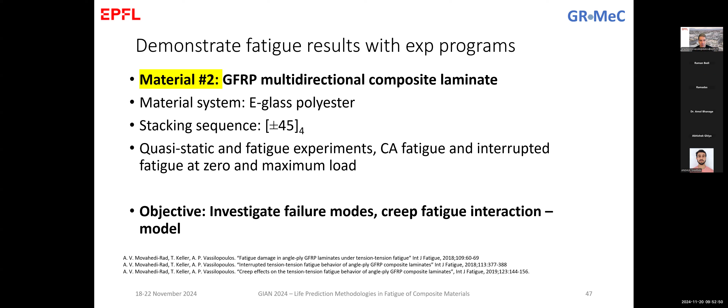I'll jump directly to the description of the experimental program. So what we did, as mentioned: we did continuous fatigue until the end, then we did interrupted fatigue loading at high stress during the interruption, keeping a high stress which was exactly the same as the maximum stress of the cyclic loading.

There we kept two different interruption times to simulate creep, 2 hours or 2 days. We also did interrupted fatigue while during the testing - we were interrupting the constant amplitude fatigue loading and going down to 0, unloading the specimen completely.

In all these cases, as we mentioned, we kept the specimen in the machine. We did not remove the specimen, to avoid what we discussed also yesterday: the effect of the gripping pressure, the alignment of the specimen, and so on.

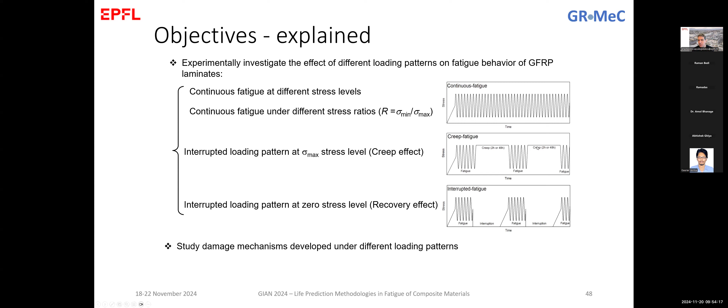So we then studied the mechanisms developed under the different loading patterns, to be able to correlate the observed phenomena to the, let's say, physics of the failure.

The material that was used was a glass epoxy laminate with plus minus 45 layup. We fabricated everything in our lab with a vacuum-assisted hand layup technique. I suppose you are familiar with this method, where we stack the plies in the orientation that we would like, apply the resin by hand, and then put everything in a vacuum to make the production more consistent.

From these laminates that we manufacture, we cut specimens according to ASTM D3039, which defines these rectangular specimens with the tabs at the ends. Then we used some techniques for the measurement of the strain with a video extensometer.

Video extensometer is similar to what you know today as DIC, but it only measures specific points. It does not give full field measurements, but I would correlate it more - I would say it resembles more a clip gauge. You have 2 points, and then you measure with the photos the distance of these 2 points, or 2 lines that you have in this case. Why did we do this?

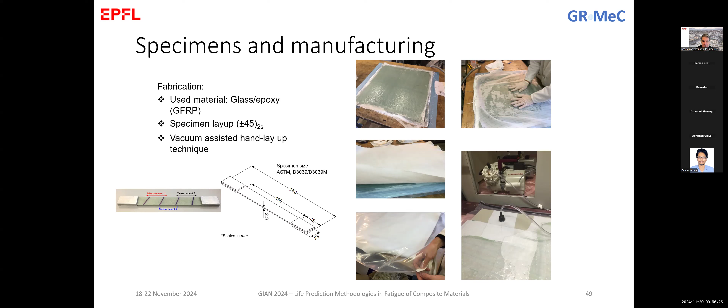You see in this photo, we have measurement 1, measurement 2, and measurement 3. The reason was that we wanted to have, first of all, the overall strain of the specimen, but also we wanted to have the local strains of the specimen, to be able to correlate this to the damage that was observed.

So fatigue testing, we'll just open this one. Fatigue testing was as usual in the chamber to keep the temperature low. We were also measuring, we have a thermal camera monitoring the temperature of the specimen. We had this video extensometer camera to take photos of the specimen and be able to extract at the end the strains. We also have a light source to improve the lighting, necessary to improve the performance of the photography.

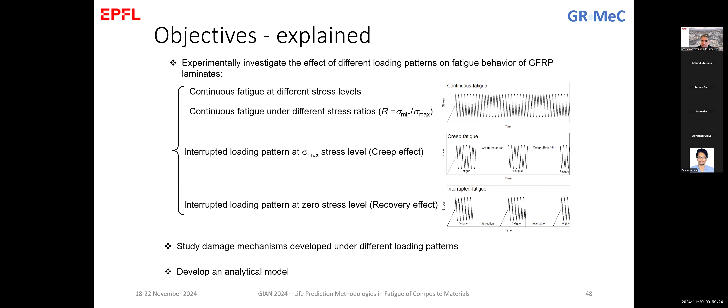So imagine when you do this experimental program, the simple recording of data when you need a simple S-N curve is to record the maximum stress and the number of cycles to failure. Only two data points. If you need to have also the hysteresis loop area, you need to record every cycle, more than 10, 15, 20 points per cycle. So you need the stress, the strain, and the number of cycles. And if you have this, you can use these data points to plot these cycles with 20, 30 points depending on the accuracy that you want.

So you see already the complexity of data handling. Here is again the question about the capacity of the machine, as Professor Bedi mentioned before, the capacity of the recording device to record so fast data, the capacity of your camera, this video extensometer camera, the frequency of photos that this camera can take, so that it gives you directly the measurement of the strain, and another point that is very significant here.

You see that we use different equipment for different measurements, and at the end we want to put them all together and draw curves. So what is very significant, and we've seen in the past that it was causing a lot of problems, is the synchronization of all these measuring devices. If you measure load with the machine and then measure strain with the video extensometer camera, and they're not synchronized, the camera gives you a strain value that does not correspond to the stress at the same time interval, and all the results will be falsified. So all these parameters have to be confirmed during preliminary experimental programs before even going into the full experimental campaign.

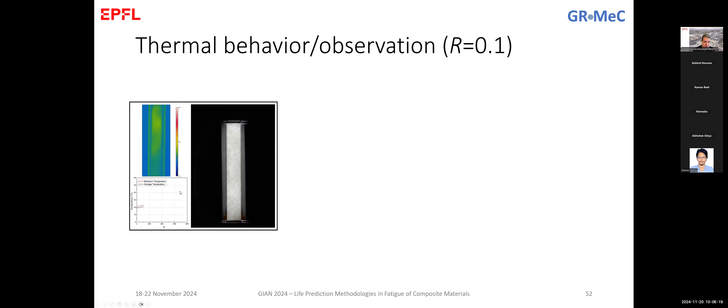Here is the thermal behavior. If you remember, we used photography with a backlight — these are the gray photos you see here — and we also used a thermal camera that gives directly a measure of the surface temperature of the specimen. You see that these two are correlated well.

The damage we can observe in the specimen is when the specimen becomes darker — these are cracks evolving in the specimen bulk. At the same time, at the location of this concentrated damage, we observe an increase of temperature, which is the result of increased friction in that location. At the end, when we go to failure, the temperature rises quite high.

This shows the limit of why we confine the frequency of the specimens. In our case, the specimen failed; although we started the test at around 20 degrees, it failed with a local temperature around 40-something degrees. Going back to the DMA result for this material's thermal analysis, we see that 50 degrees is still within the glassy region of the material, so for us this is an acceptable failure.

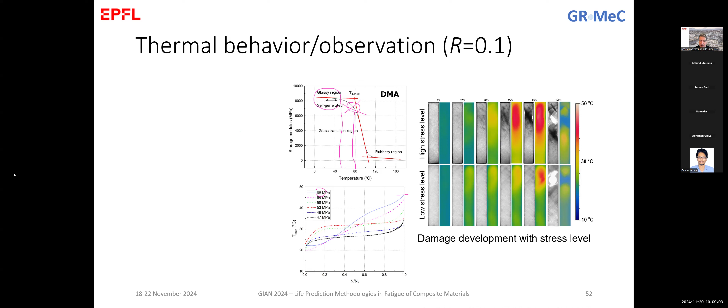Coming back to the discussion we had before and trying to explain this effect: at high stress levels we have fiber pull-out because the excessive load was significant enough to pull out the fibers directly. Remember, the fibers are not continuous from one loading point to the other, as we have the specimen loaded in the machine. So at high loads, these fibers were teared out directly from the specimen, with very local, very little damage in the bulk of the specimen.

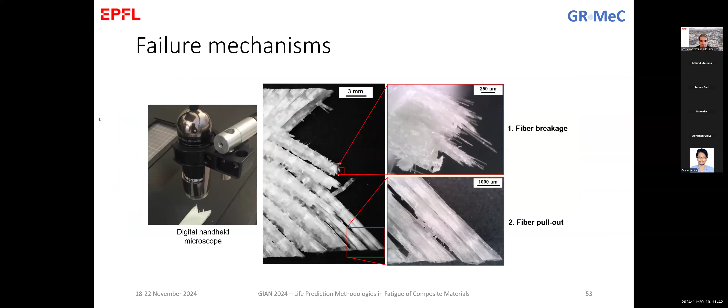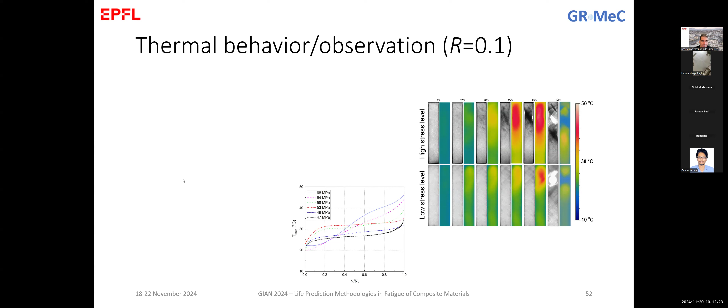Going back to these observations, this photo shows a comparison between the high stress level and the low stress level, and we can see these effects. In high stress levels, we have localized damage that led exactly to this fiber pull-out. In lower stress levels, we have distributed damage—you don't see any significant damage concentration anywhere; it is spread all around the specimen. This is the reason damage accumulates as matrix failures and causes this failure mode at the end.

Hello, sir, I have one question. Yes. Sir, what is the effect you are seeing in thermal imaging?

That is because the fibers are plus minus 45. Would we also see similar behavior in UD composites? Yes, you mean for the thermal? For the increase in temperature? Yes, you see it, but it's not so significant. Sir, is this effect because of friction between the fibers? The thermal increase is due to friction between damaged surfaces. In a unidirectional material, you don't have as much damage during loading as with plus minus 45, and the deformation is not as significant. So if you have reduced deformation, it means reduced friction, which means reduced temperature increase.

One more question regarding the experimental setup, about these fans. Are these fans to maintain the ambient temperature constant, or are they also taking heat away from the specimen? Yeah exactly, the fans are not for maintaining.

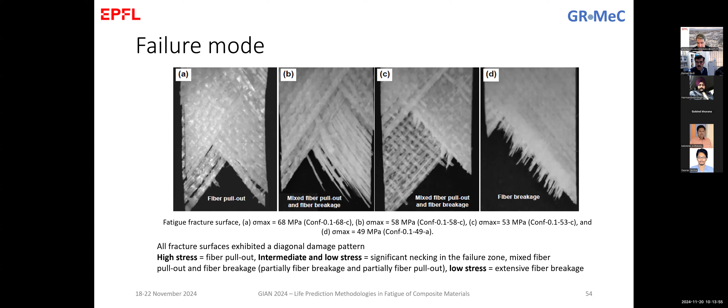But why do we want to lower the temperature of the specimen? Because you need to keep the frequency as high as possible without heating the specimen. This is the reason for putting the specimen also in the chamber.

During the loading, you increase the temperature. Yes, if you let it without the chamber, it might be that the temperature at the end goes to 80 degrees. So your specimen fails, but fails not in an accepted way because it is softer.

So to avoid this, you can do two things. Either you test at very low frequencies, so you have to test the specimen at 1 or 2 hertz, which takes ages at the end to finish your testing. Or as an alternative, you try to cool down the specimen somehow. In this case, we found these methods with the chamber and the additional fan that seems to work quite well.

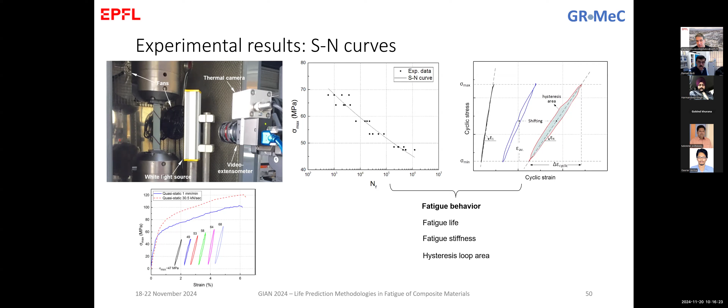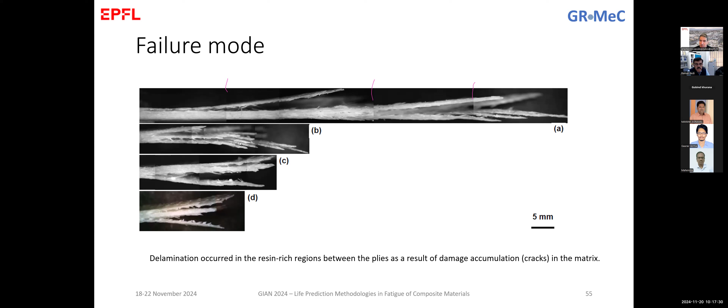But what we see here in this slide is the delamination that occurred in the resin between the layers. So these are layers - one layer, second layer, third layer, and so on. We had in total 8 layers of material, and we see that during the loading you have a lot of delamination in different places of the material, and this delamination propagates. It's not only localized at the fracture region, but it is propagating to the specimen around the crack, around the damaged area.

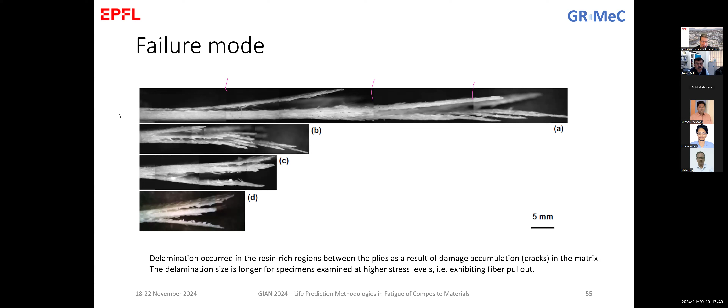So you probably remember, there is a lot of repetition of results, and it's a proof or validation of what we were discussing the previous days. We discussed about this reorientation of the fibers, and here we quantified this. We've seen that in our case, we had more or less even up to 3-4 degrees of angle change with the loading.

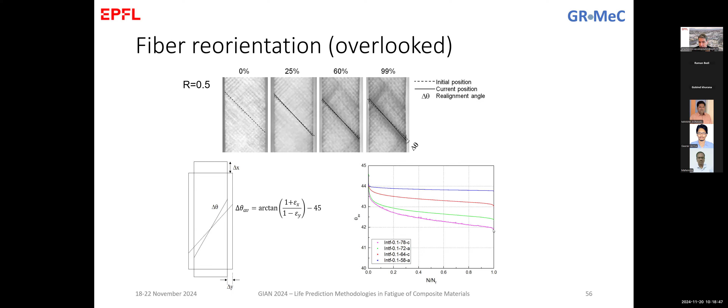And especially, of course, you can imagine this angle increase or reorientation, as we call it, is more significant for higher loads, because when you load at higher stresses, you actually apply more pressure to the material, and it changes more. So at low stress levels, we've seen 1 or 2 degrees, and at high stress levels, we had up to 3-4 degrees of reorientation. This is quite significant depending on the material, on the anisotropy of the material.

When the fibers orient in different directions and become aligned with the specimen loading, then the specimen is stiffer than before. That's why we can explain this increase here.

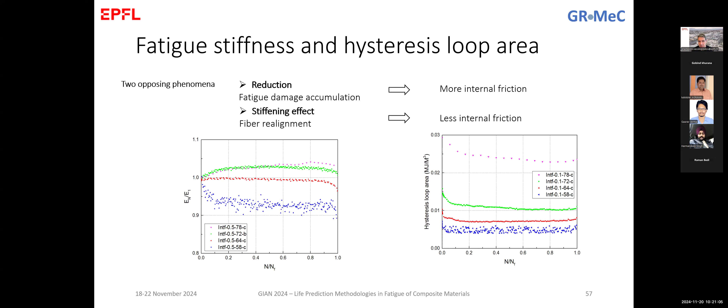Another part of the investigation was the loading type. We did two different loads, both tensile, so we avoided compressive loading to prevent buckling problems and didn't want to use anti-buckling devices. We've seen that the scatter was more at R=0.5 compared to R=0.1.

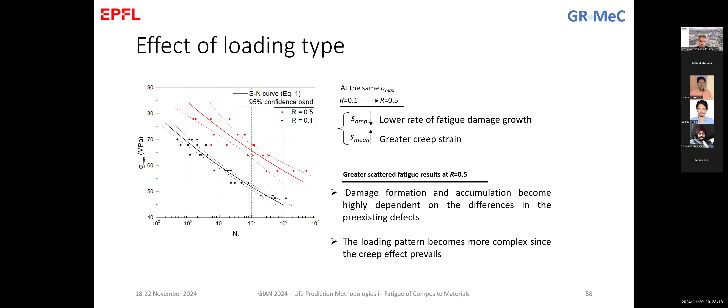This is probably related to the maximum stress. Let me plot this and start the discussion about the creep effect we'll see later. If this is 0.1 testing, stress over number of cycles, and 0.5 for the same stress max, comparing these two stress levels for the same maximum stress, your test for 0.5 might look like this, which means for the same maximum stress we have an average, a continuous stress on the specimen that is higher than this. This difference can be attributed to the creep effects that prevail more in this loading case compared to the R=0.1 case. So, as we discussed yesterday, the fitting here is a simple power law fitting with confidence bounds defined by ASTM E739, the typical fitting equations suggested by ASTM.

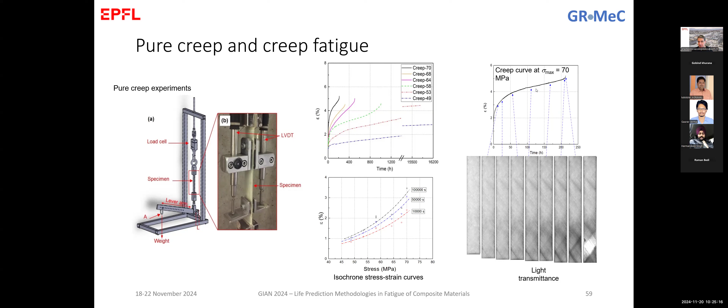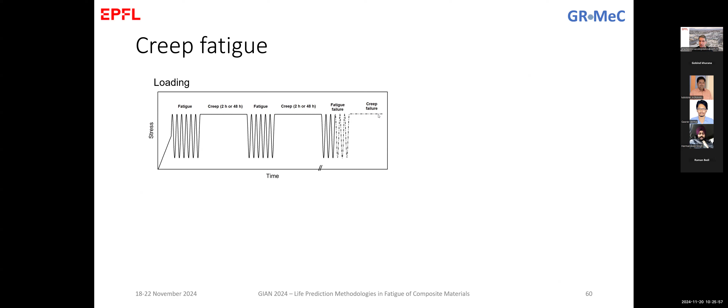Talking about creep, we then realized this creep-fatigue testing with the same constant amplitude, keeping at high stresses and so on until failure. I have it with dashed lines because in some cases, depending on many parameters like the stress level and the time kept under load—these 2 hours or 48 hours—in some cases we had failure during the fatigue loading, and in other cases failure during the creep loading. The results are shown here.

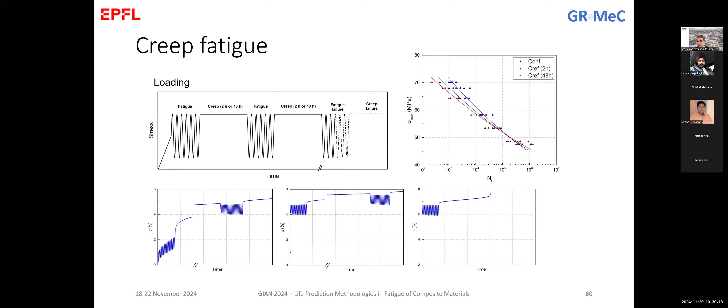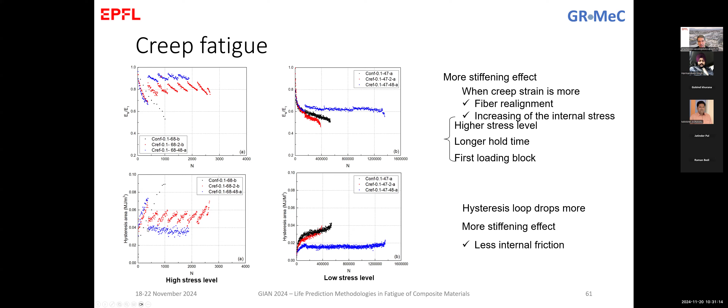This is for high stress levels, and the same happens for lower stress levels. Discussing the blue curve here, for example: we have stiffness that drops, and while we interrupt, the stiffness recovers and goes back, and so on until failure. The same behavior happens with the hysteresis loop areas.

If we compare the two cases of 48 hours and 2 hours of creep, we see that the damage in the case of 2 hours of creep is more due to fatigue damage during loading, with creep contributing only at the end. When we go to 48 hours, we see that creep is more dominant for the material performance, and in some cases, the material fails even under creep loads and not under fatigue loads at the end.

In the cases where we left the material to creep only for 2 hours, we mainly observe fatigue failure. In the cases where we left the material to creep for 48 hours, in some cases, especially at high stress levels, we were observing creep failure.

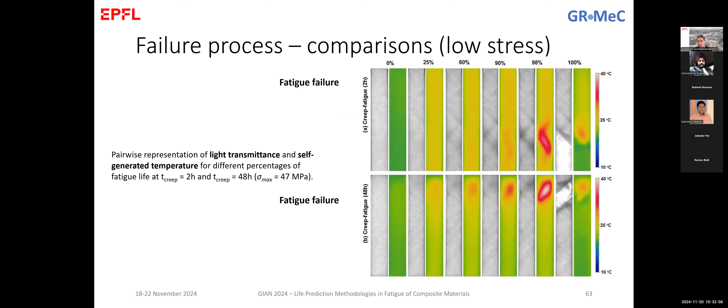The same comparison applies for a different material at low stress levels, where the creep stress was not significant and it took very long times for failure. In both cases, we observed fatigue failures.

Discussing the failure modes briefly, photos taken with the same handheld microscope show similar behavior to what we observed before, with fiber pull-out and fiber breakage. The dominant fiber breakage occurs in specimens loaded at lower stress levels, exactly as we've seen before, while at high stress levels we mainly have fiber pull-out.

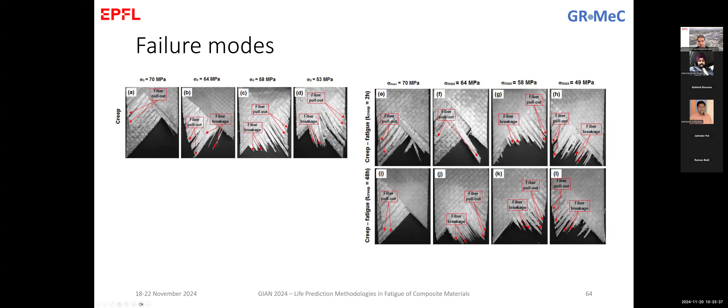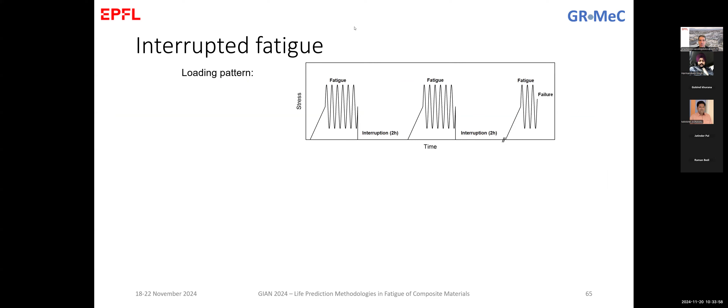So, probably now that we'll talk about interrupted fatigue, using the same joke as yesterday, we can interrupt for this first hour to take a break and resume in 5-10 minutes. Professor Bedi, if you are still there?

Yes, we can break for 5 minutes.